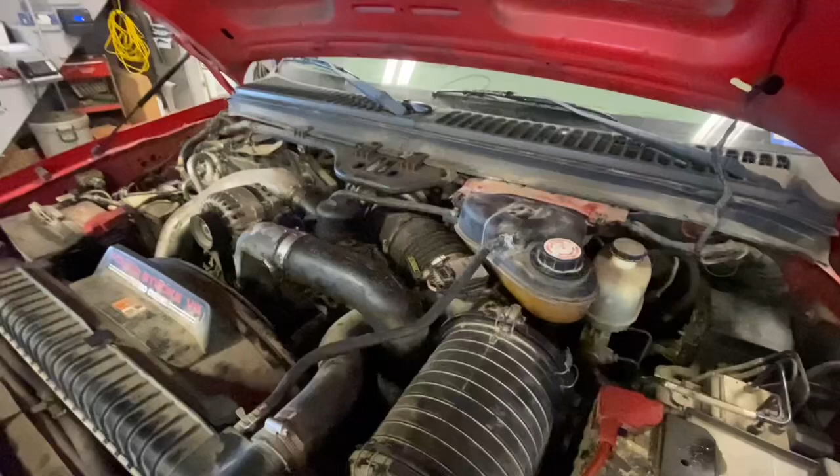Today in the shop we are diagnosing a 2006 F250 with a 6-liter diesel engine that won't start. No start is probably not the best description for what this truck is actually doing. Sometimes it won't start at all, sometimes it will start and die immediately. I think the best I've had it do was run for like a minute and then it just died like the key was shut off.

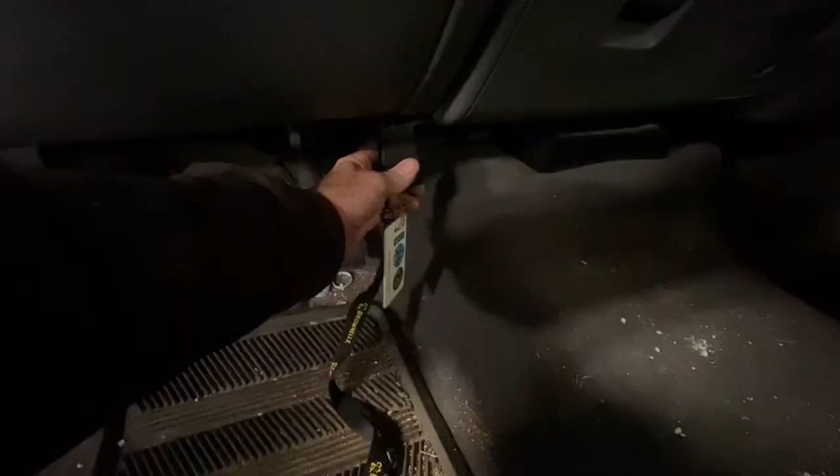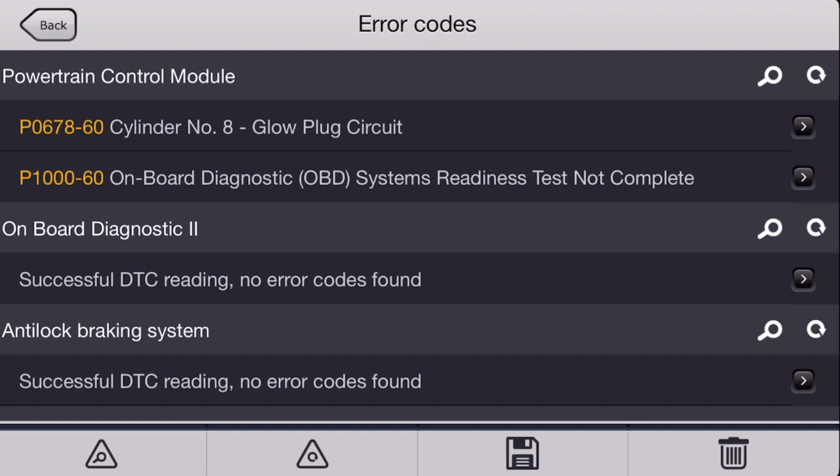I'm going to be using FORScan Lite along with an OBD-Link MX Plus Bluetooth adapter today for diagnosis. Let's take a look and see what we have for codes in this. And we have a P1000, so someone else has already looked at this and cleared the codes. We also have a P0678 cylinder 8 glow plug, but that's not going to keep the engine from running. It certainly won't make it die after it starts.

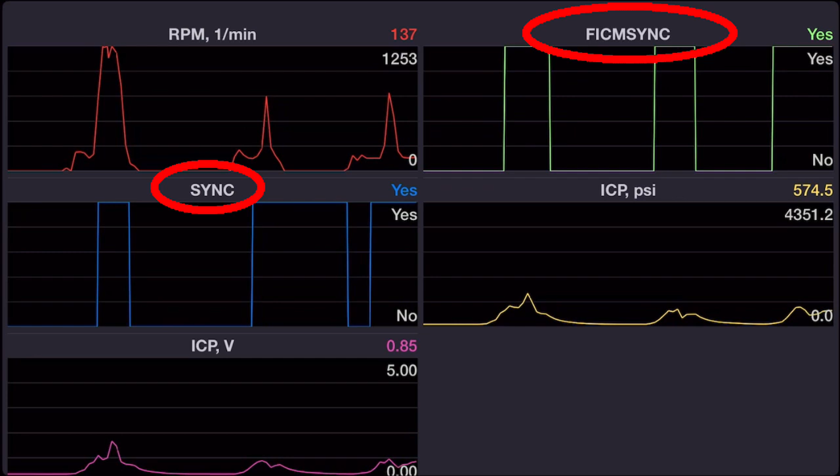Let's take a look and see what the injector control pressure is doing. And I also have the sync and the FICM sync PIDs up here. Sync is the correlation between the crankshaft and the camshaft sensors. Both of those need to read yes for the engine to start and run. Our sync and our FICM sync PIDs look good. I don't see a problem with those. They both go to yes when the engine's cranking.

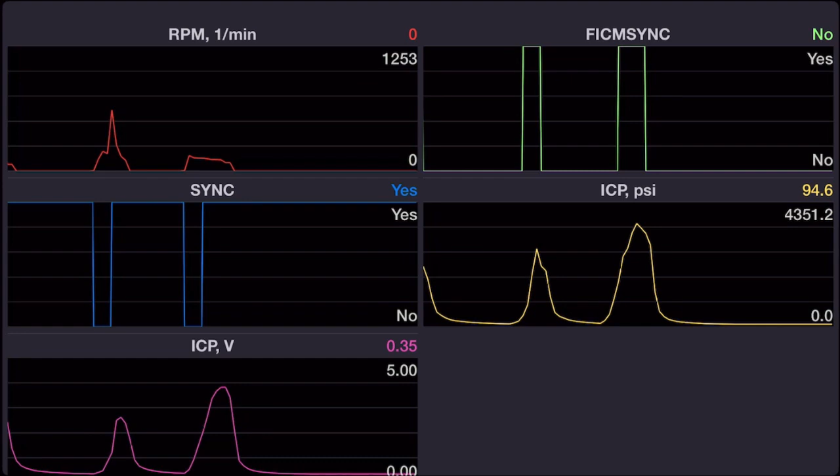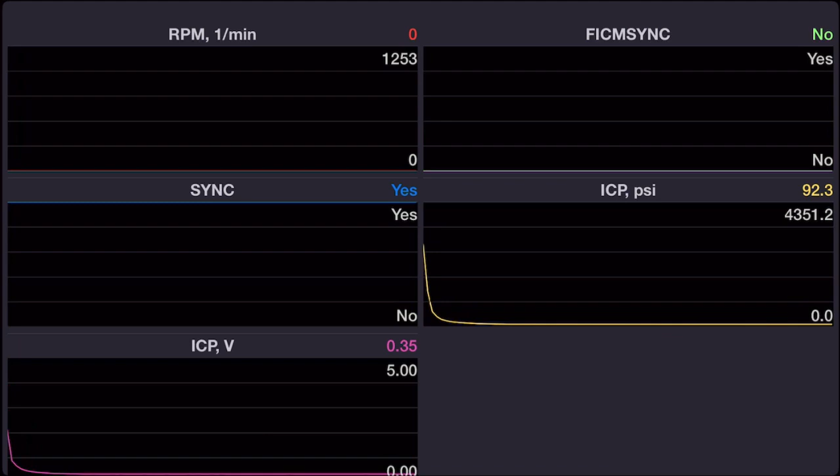Our ICP pressure, though, it varies. It's not real consistent when we're cranking, and I'm not quite sure why it didn't start there, because the minimum ICP pressure you need for it to turn on the injection system is 500 psi, and we've got way more than that. We had 3,600 and some, I think, there at the last cranking, but you'll notice it got higher each time we cranked the engine there. It wasn't really consistent like it should be. And this time it started. Let's go ahead and shut it off and try it again.

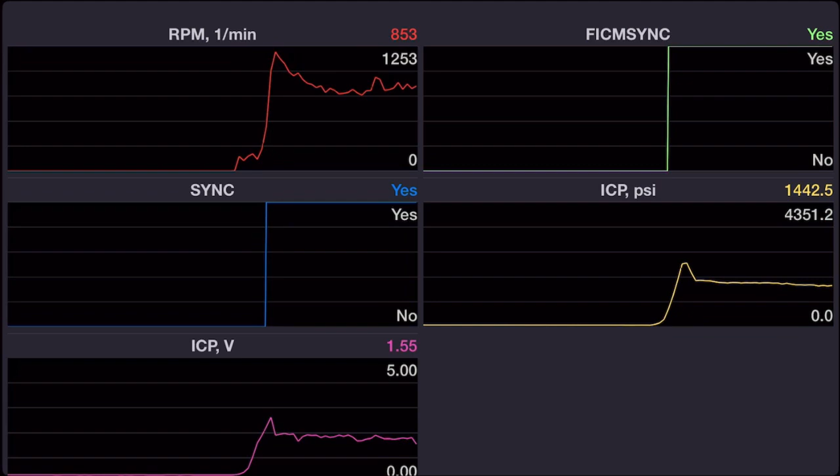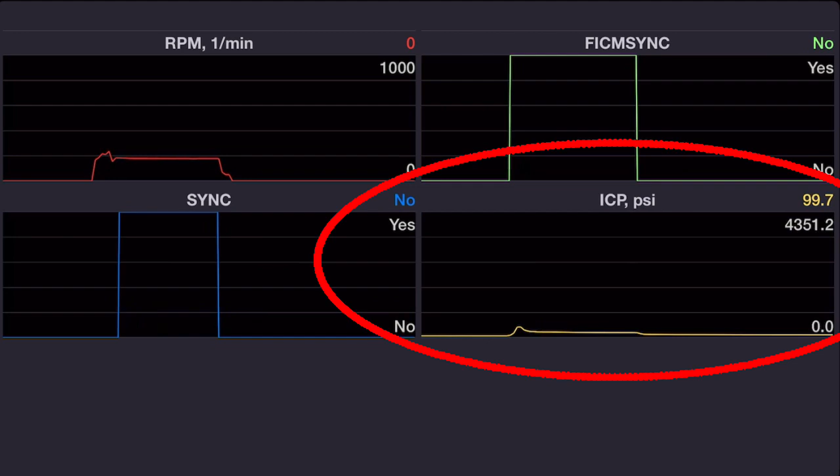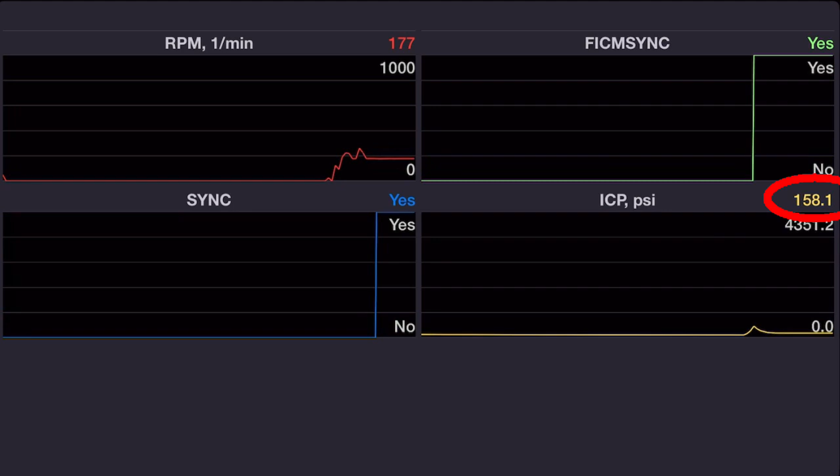I've gotten rid of the ICP voltage PID here. We're just going to watch the injector control pressure PID. And as you can see here, we no longer have injector control pressure. Nowhere near the 500 we need for it to turn on the injection system. Let's try and crank it again, and we're going to watch real closely what the ICP pressure does. We need a minimum of 500 psi for it to even turn on the injectors. And we have nowhere near enough. I think the highest I saw there was 400 psi when we first started cranking, and then it dropped down to 100 and something. At this point, let's get under the hood and check a few basic things.

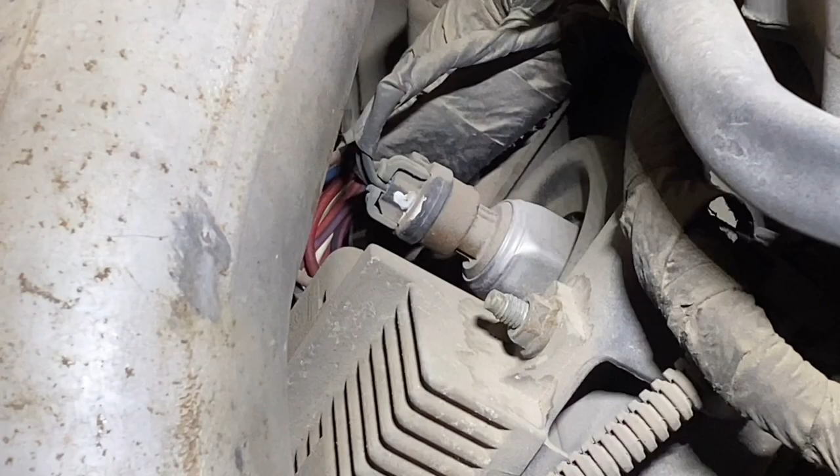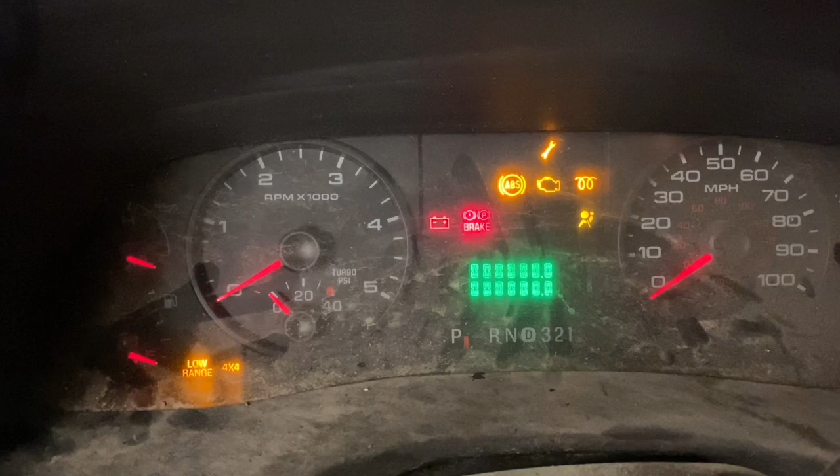The quickest way I know of to check for a bad ICP sensor or an issue with the pigtail is just to unplug the ICP sensor. The PCM, if it can't read the ICP sensor, will just assume it has pressure and turn on the injection system and let the engine start. If the engine doesn't start, you really don't have high pressure oil. If the engine starts, it's a bad sensor or an issue with the pigtail. And this is looking like we really have a problem with the high pressure oil system.

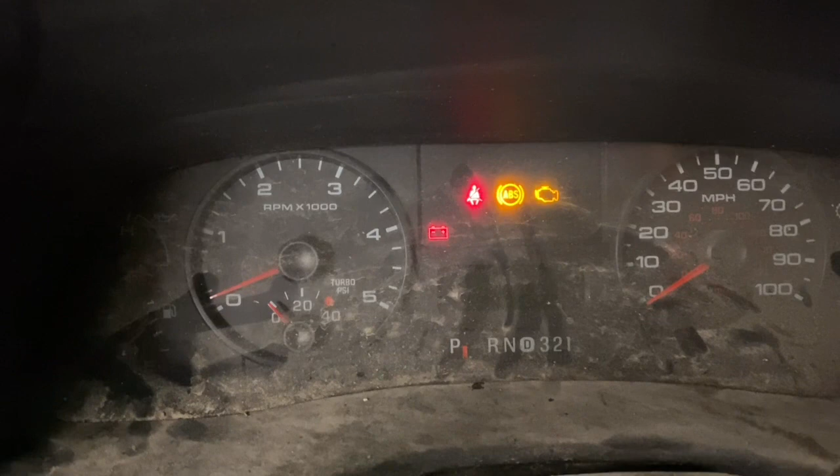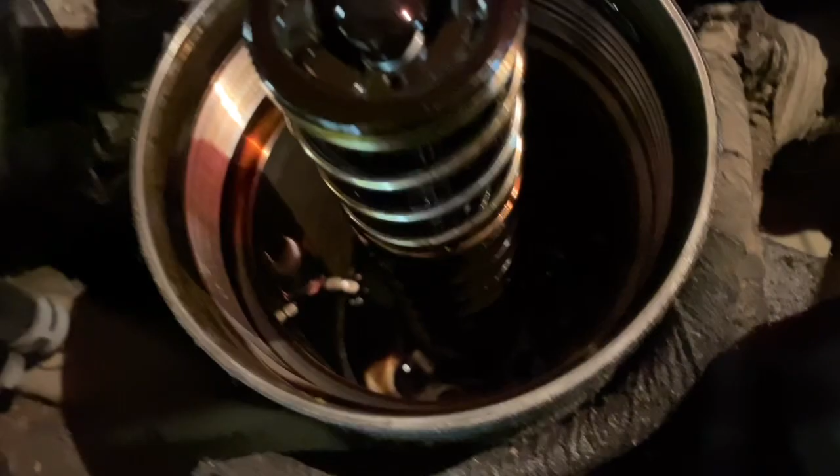Now, since we had ICP pressure and then we lost it, I'm going to pull the oil filter real quick and just make sure we are still pumping oil. Nothing catastrophic has happened on the bottom or the oil pump on this engine. And we seem to be pumping oil fine, so let's move on to checking the high pressure system for leaks. I've removed the ICP sensor and I've screwed an adapter into it that allows me to blow compressed air into that hole, and that way we can check for leaks or listen for leaks.

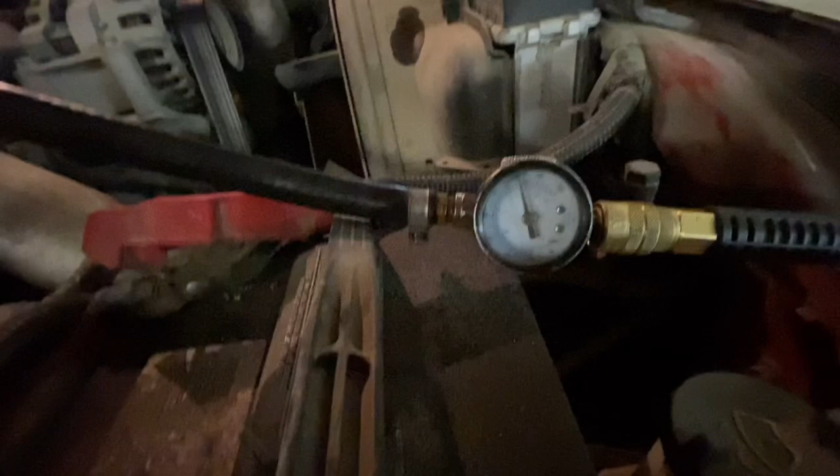To leak test the system, you have to plug in a scan tool and command the IPR solenoid to 100% or as close as you can get it. The IPR solenoid is normally open and just dumps off the high pressure oil to regulate it. The thing I've noticed on this one is I have almost no leakage, and I haven't plugged in a scan tool and taken the IPR up to 100% yet, and that's not right. Without the IPR commanded to 100%, it should have a huge leak in the system. There's always a very small leak in the high pressure oil system because there's no seal where the shaft goes into the high pressure pump. So at this point I'm really starting to think we have a sticking IPR solenoid.

Now I did plug in a scan tool and tried commanding it, and it would go from 100% sealed to leaking around 20%, and that's not really right either. You should have to take the IPR up to 75, 85%, and at that point it should start pretty much sealing, usually, but it just acts strange and is inconsistent, so I think we're going to try an IPR solenoid in it.

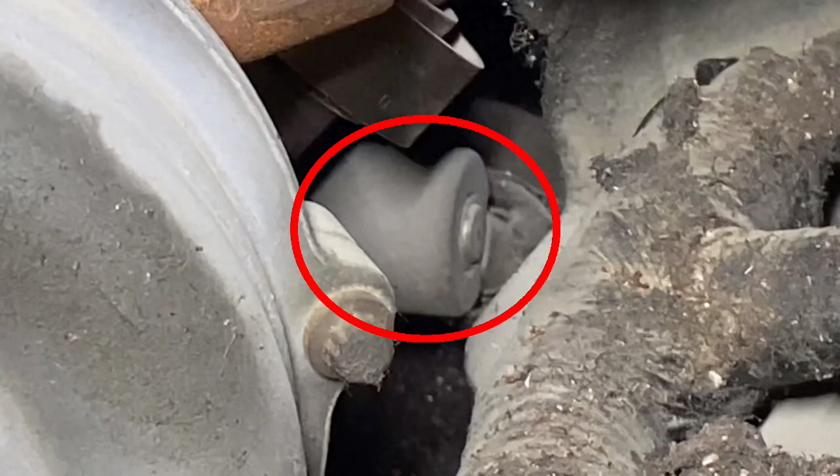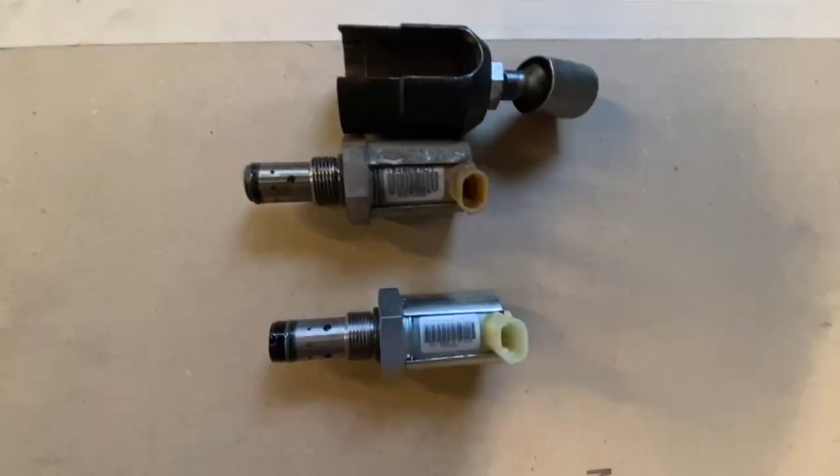The IPR is located in the valley, kind of behind and under the turbo, and to replace it we're going to have to remove the fuel injection control module and the rear mounting bracket for the control module, and it will take a special socket. It could probably be done without the socket, but you would have to pull the turbo and use an end wrench. And the IPR is just threaded and screws out. And the screen came off the old one here, so we'll have to fish that out with a pick. The screen's not completely plugged, but there's definitely some garbage in it, so change your oil, people.

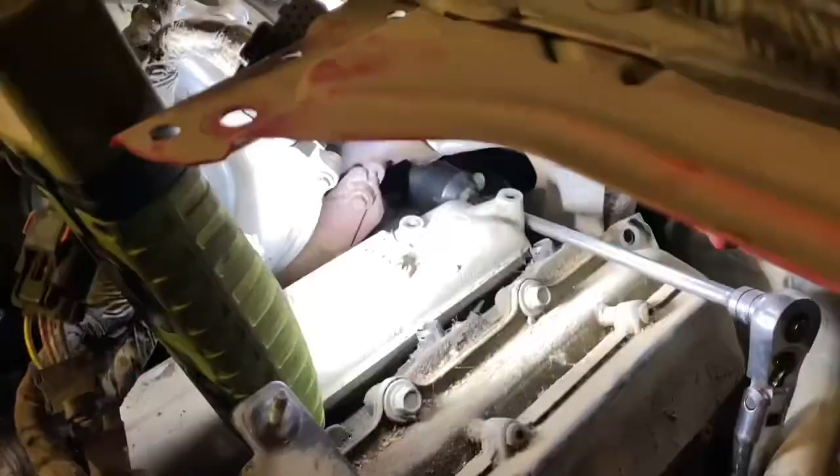So with the IPR replaced, let's see if it runs. And we will have to crank this for just a minute. Anytime you have the high pressure oil system open, air gets in the system, and air is a lot more compressible than oil, so it's going to take it just a minute to build pressure. Really, to get the air all out of the system, it will have to be driven.